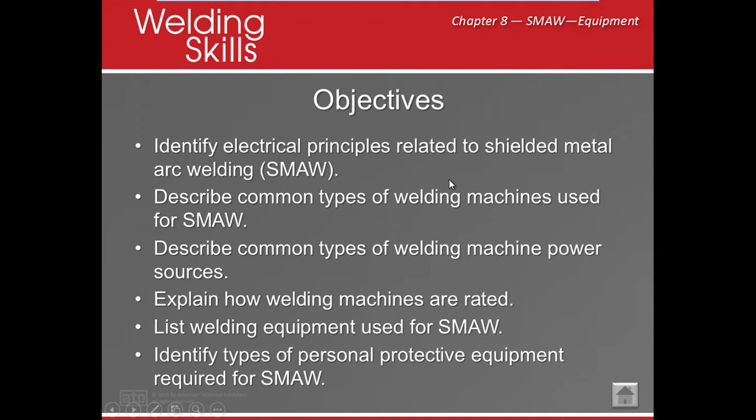So what happens is alternating current has both. A half of it is positive and it droops down, it goes to 0, and then it goes to negative. Alternating current isn't usually used in stick welding for structural material, but it can be used. And it makes the current go back and forth to our workpiece. So there are certain things that require it. So we always have to remember that not everything requires it, but sometimes it does.

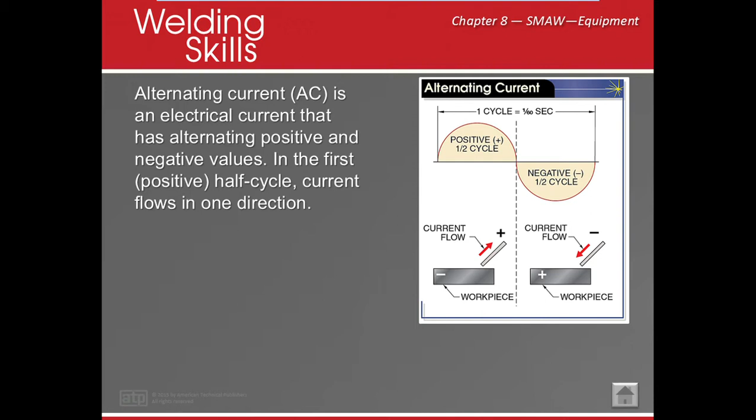So electrode negative is a bit of a new term. They used to call it direct current straight polarity, or DCSP. And it tells me it is straight. So if it is straight, I know it goes straight down. Now, there's another one: direct current electrode positive.

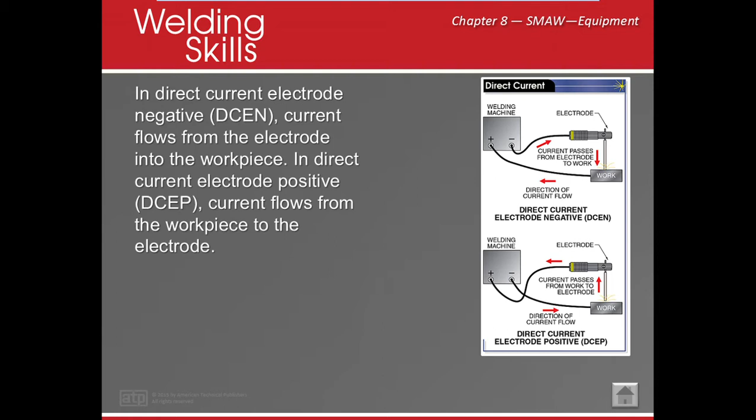Electrode positive means my electrode itself is positive and my ground is negative, which means if I work in electrode positive, it goes from my work up into the electrode and around. So there's two different ways, and the other term for electrode positive would be DC reverse polarity, DCRP. So we know it reverses, it goes the other way, it reverses up.

All right, so the next thing we're going to look at is voltage and current. You guys have noticed that there's a little thing that says V and another that says A. A is for amps. Another word for amps would be current. Amps and current affect your heat. So I may ask you, what is your heat at? What are you set at? Well, we're going to talk about amps when we say that.

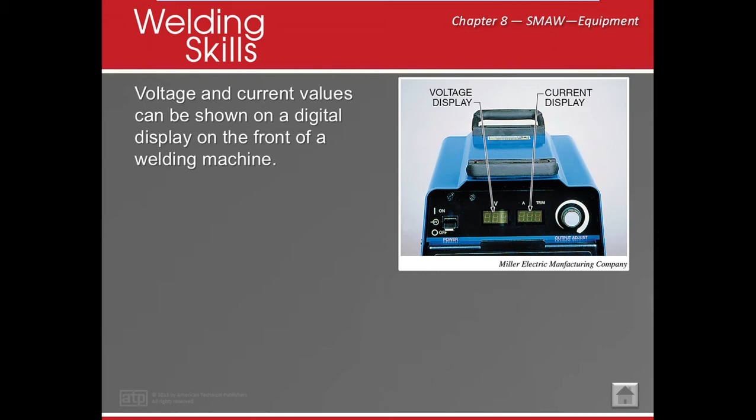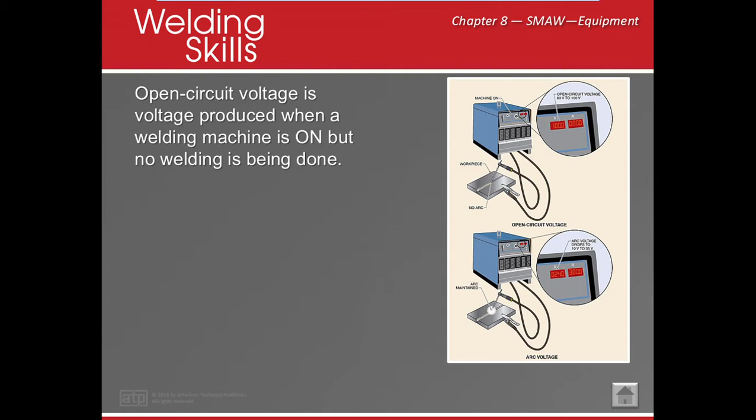All right, open circuit voltage. So I've got my machine on. I have my ground plugged in. I have my electrode and my electrode holder, my stinger. We're ready to go. We're ready to weld, but we haven't touched it to the plate yet. The lights are on, but nobody's home. So as soon as we touch it, it becomes arc voltage.

All right, so we really need to understand positive and negative because it creates polarity. Certain rods require certain polarities to work correctly. Certain types of material require a certain type of polarity for it to be welded correctly and to melt. So we need to understand that. Whether we have electrode positive or electrode negative, it tells us which way the current is flowing.

All right, now we can talk about different types of machines. Machines have different types of output: AC, or alternating current, and direct current. Direct current means it can only flow in one direction. So maybe I'm talking about DC electrode positive; it can only go one direction, the positive direction. If I talk about DC electrode negative, it can only go the straight way. It's only going in one direction. It cannot go both.

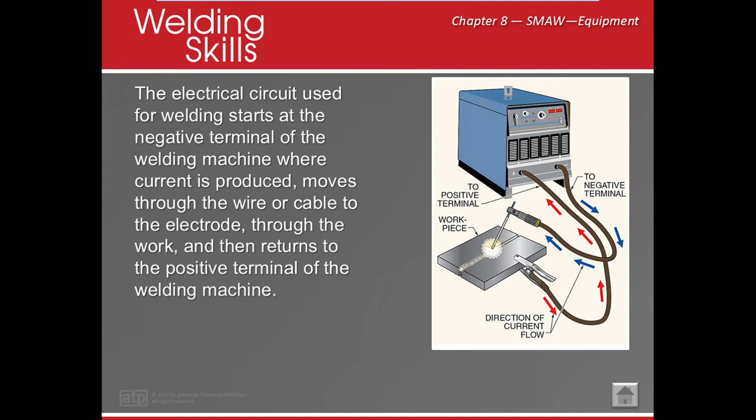So we have AC and DC, and different machines, depending on what we're trying to do, can have both or can just have one. An AC/DC machine is commonly used for stick welding. There's also a particular power source that's required in these machines for them to melt the material correctly. One is called constant current, CC. Constant current tells us that the machine will always try to keep my current or my amperage the same.

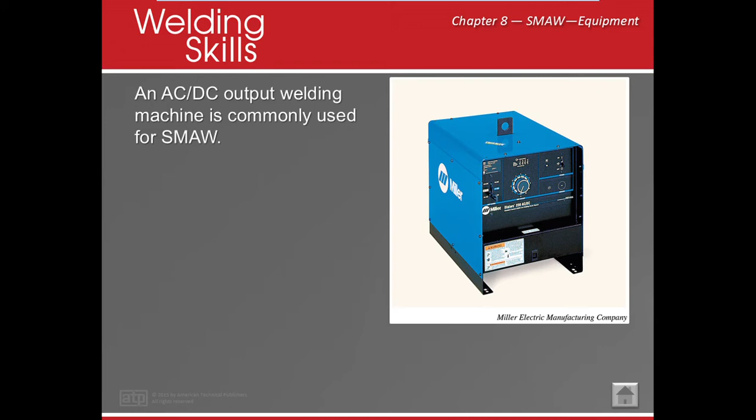And I want to keep that 100 amps no matter what I'm doing when I'm welding. So it will change the voltage in order to accommodate what I'm asking, keeping the amperage the same. But when we have a long arc or a short arc or a regular arc, it affects our heat. Okay? So we want to make sure that we are consistent.

That little fire that comes out from the end of your electrode to your plate, that is called arc length. We want an arc length about the size or about the diameter of our electrode or our rod. So currently we are running 1/8 inch E6010. So we want the arc length to be 1/8 of an inch. Now, so that would be our normal arc.

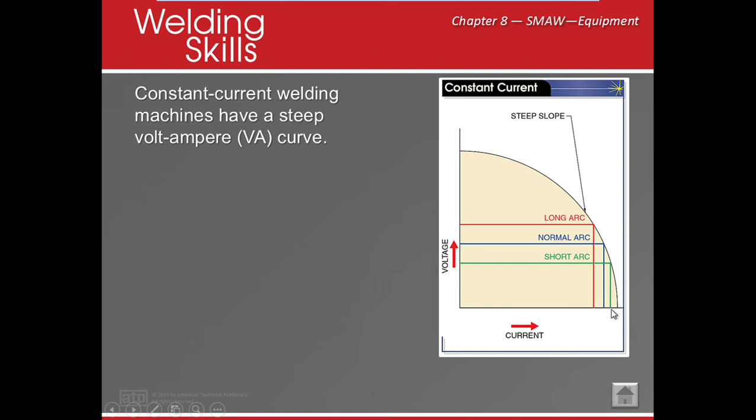But if I got shorter than that, it can change my current. And if I got longer than that, it can change my current. So if I go too long, it'll get hotter. And if I get too close, it'll get cold and more than likely it'll stick. Okay, so depending on what I needed to do, depends on what terminal I plug it in, to the positive or to the negative.

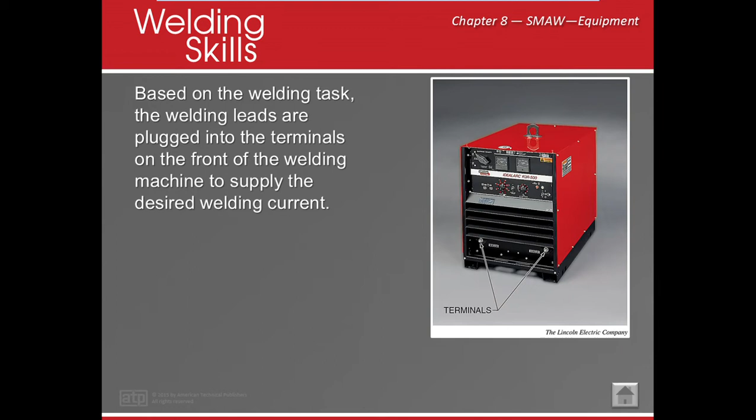Let me tell you about the machines. There's all kinds of machines, okay? There's not just one machine that does it all. There's not one rod that does it all. There's not one process that does it all. And there's not one machine that does it all. So you need to make sure that you understand that we need to choose the machine that's right for the task. Okay, so this type of machine is called a transformer rectifier.

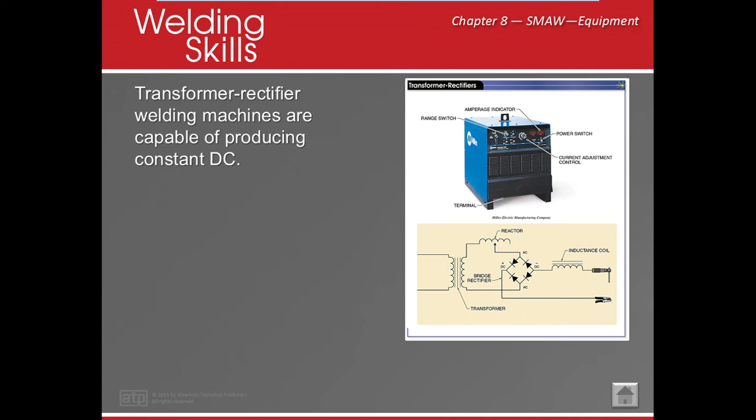Usually does DC current only, whether it's DC electrode negative or electrode positive, it only does DC. These are big old behemoth machines. These are probably looking at about 500 pounds. That's why they have that little hook on top, and it makes it a little bit easier for them to either put it in a crane or put it on a forklift. These machines usually have a lot smoother arc. The arc is very consistent. And this is probably the most common stick machine that you're going to see in big shops.

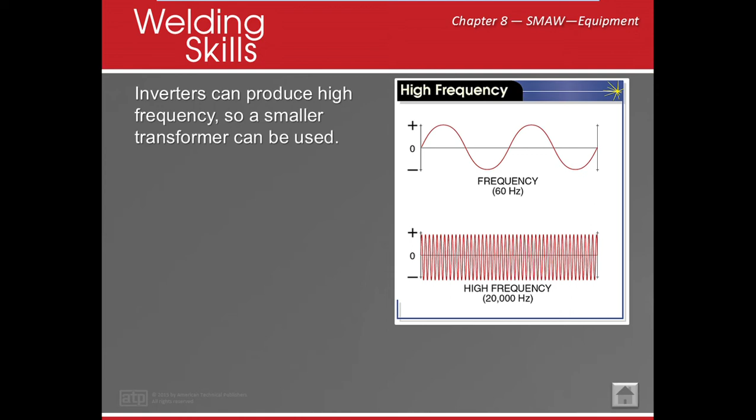Okay. The other one, inverters. Inverters are the coolest machines, and that's probably some of the newest technology that's out. Inverters allow us to change the frequency of our wave, whether it's higher or lower. But being able to do that also allows us to make a smaller machine. The components can be smaller. Okay, I'll come back here. So because our components can be smaller, that means we can do a lot more different things with it. So if you notice, there's a lot of stick machines that are the size of a shoebox. They're getting smaller and smaller.

Okay, and the other one is engine-driven. These machines are great, but you also have to remember that these are meant for outdoor applications. There is exhaust. Most of the time, they only do DC. If you want one that does AC, it's a considerable amount of money. And I've noticed personally welding on an engine-driven machine, whenever the engine idles or whether the engine comes on or off, it will also affect your arc.

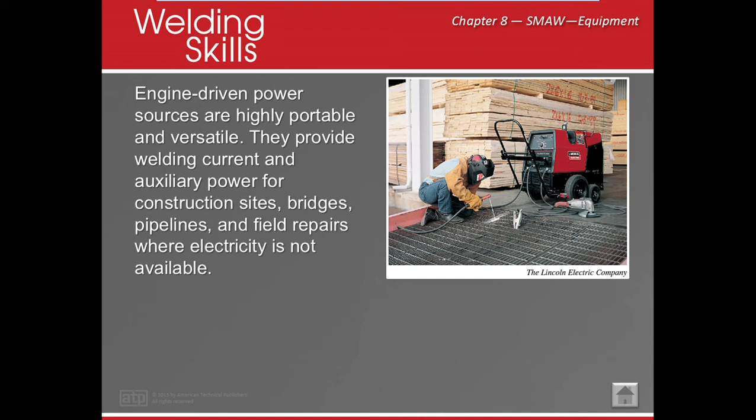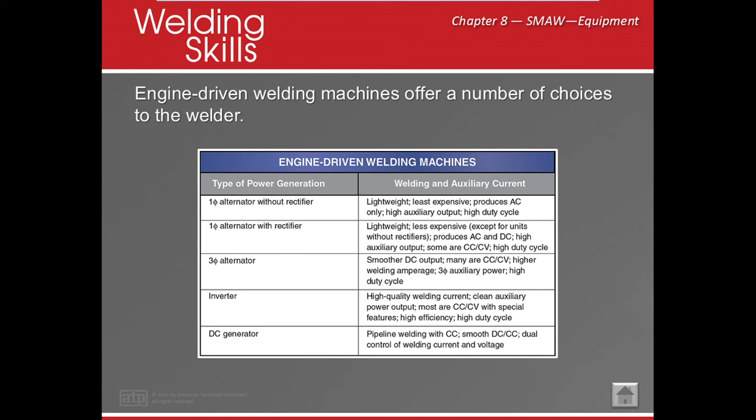So let's give another example. On average, many duty cycles are 60%. In a 10-minute period, that would be what? That would be 6 minutes. Now, how many minutes need to be resting out of that 10 minutes? Well, 10 minus 6 would be 4. So I need to have 4 minutes resting.

Now, what happens if I run my machine past that? Well, you're more likely to melt down the component parts of your machine. First thing, you're probably going to hit a reset, and the machine's going to wait until it cools off. And I've actually seen it when somebody hits it too much, it actually melts the machine down and you can no longer use it. It becomes bad.